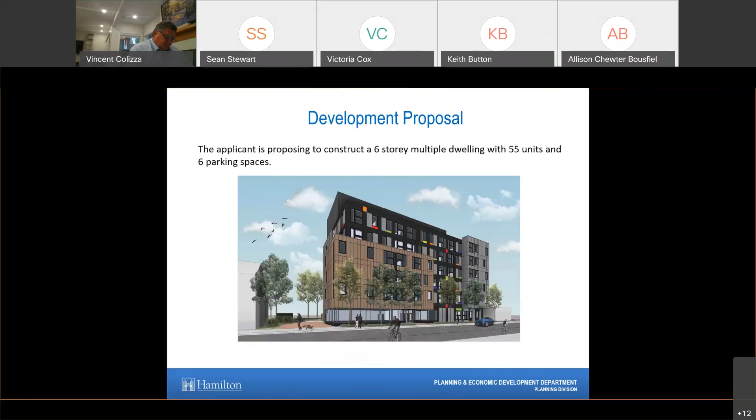This image shows the proposed site plan. Again, the building is fronting onto Bay Street North. The parking would be off of Cannon Street West, and there's amenity space behind the proposed building.

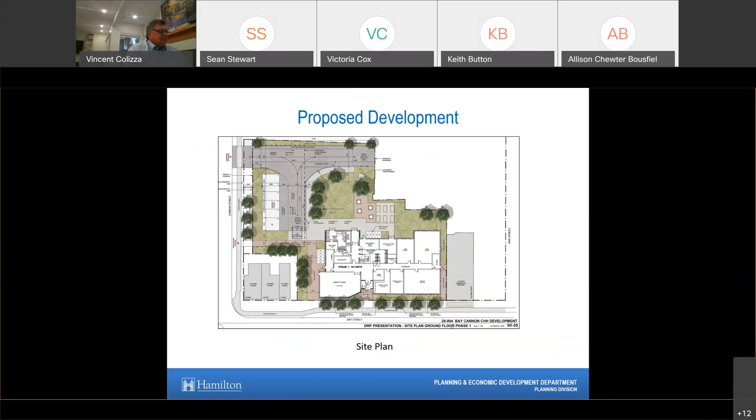The property is located within the Downtown Urban Growth Center on Schedule E of the Urban Hamilton Official Plan. It's also designated the Downtown Mixed Use Area on Schedule E1 of the Urban Hamilton Official Plan.

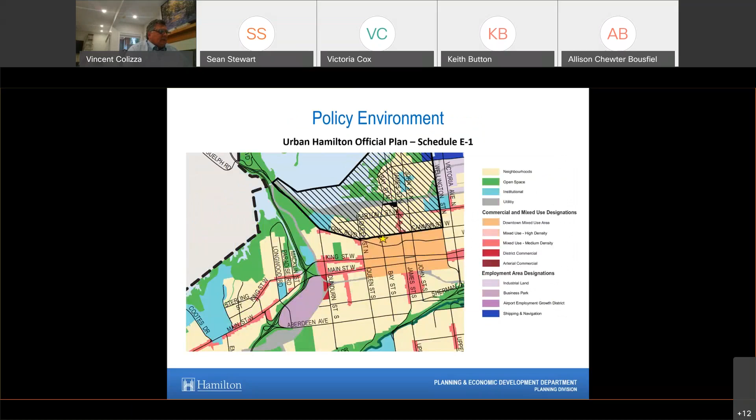Some major policy themes for the Downtown Urban Growth Center: it shall be the preeminent node in Hamilton due to its scale, density, range of uses, function, and identity. It shall be planned for a range of uses appropriate to its role as the city's preeminent node. It shall function as a residential neighborhood with a large and diverse population and range of housing types. The downtown mixed-use area shall serve as a central focus for the city by creating a sense of place.

Residential uses are permitted on lands designated downtown mixed use. A higher density form of housing shall be encouraged. Permitted uses shall be located in both single and mixed-use buildings.

Some urban design policies in the UHOP: the Urban Growth Center shall be designed with a strong pedestrian focus to create a comfortable and animated pedestrian environment, respect the character, development patterns, and built form and landscapes, promote quality design consistent with the locale and surrounding environment, contribute to the character and ambiance of the community through appropriate design of streetscapes and amenity areas, massing development to respect existing and planned street proportions, and designing new development to minimize impact on neighboring buildings and public spaces, including providing appropriate transitions in scale, and create a comfortable pedestrian environment.

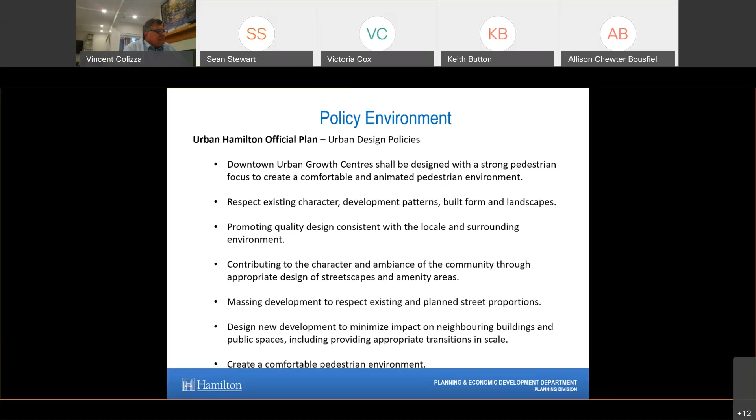The property is located in the downtown mixed-use designation of the Downtown Hamilton Secondary Plan.

It's also designated as High-Rise 2 in the Downtown Hamilton Secondary Plan. The downtown mixed-use designation supports intensive urban-scale mixed-use development, and the High-Rise 2 designation permits building heights up to 30 stories.

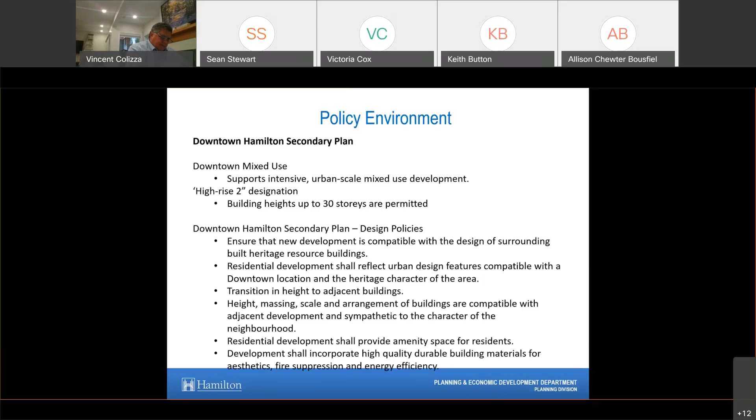Some design policies for the Downtown Hamilton Secondary Plan to be mindful of: development shall ensure it's compatible with the design of surrounding built heritage resource buildings. Residential development shall reflect urban design features compatible with the downtown location and the heritage character of the area. Consider transition in height to adjacent buildings. The height, massing, scale, and arrangement of buildings are compatible with adjacent development and sympathetic to the character of the neighborhood. Residential development shall provide amenity space for residents and shall incorporate high-quality, durable building materials for aesthetics, fire suppression, and energy efficiency.

The property is located in the D1 zone, downtown central business district. There are 3 holding provisions currently assigned to the property; however, they don't apply to the proposed development, as it's under 44 meters in height. The zone provides for a mixture of uses, including residential and standalone or mixed-use buildings. The maximum height is 94 meters.

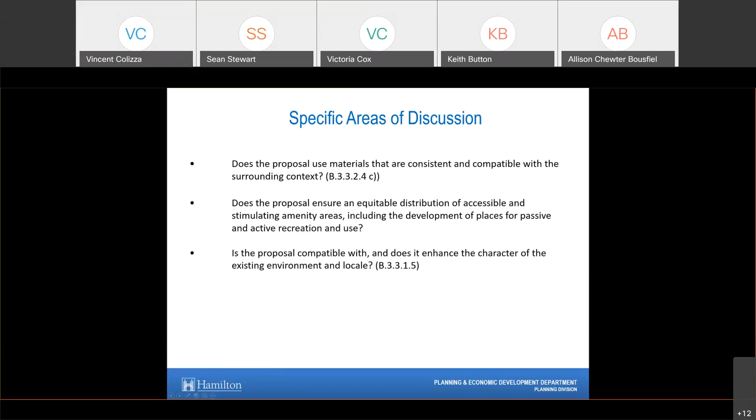Some specific areas of discussion that staff would like the panel to consider: Does the proposal use materials that are consistent and compatible with the surrounding context? Does the proposal ensure an equitable distribution of accessible and stimulating amenity areas, including the development of places for passive and active recreation and use? And is the proposal compatible with and does it enhance the character of the existing environment and locale? That concludes my presentation. Thank you.

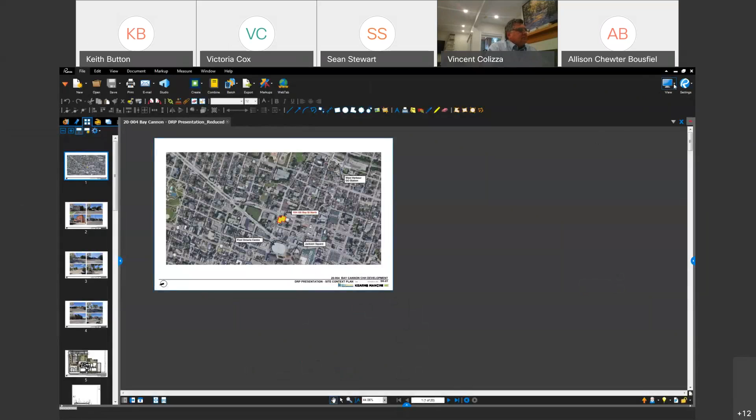Can everyone see my screen? No, sorry, we're not able to see it. Okay. What about now? Yeah, we're starting to see it here. Yes, now we can see it. Okay.

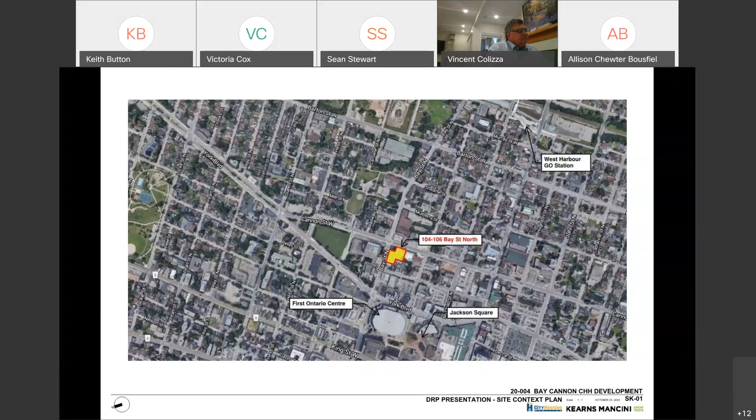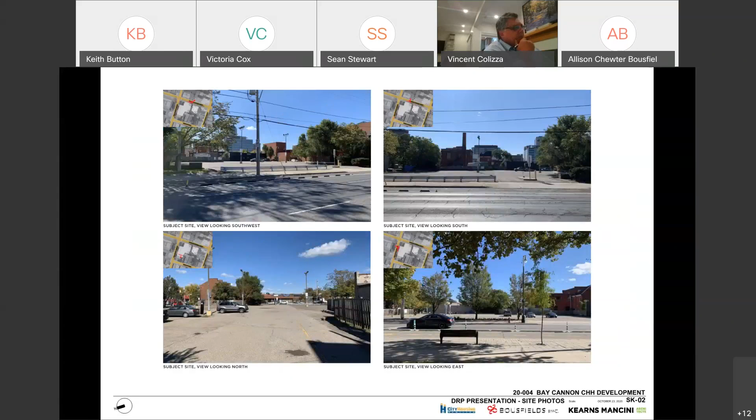I probably will not go through the items that Sean has just gone through, so I'm going to skip this context plan, as well as the surrounding neighborhood context. The current site is an existing city parking lot.

Can I just say that your voice isn't coming through very clearly? I'm not sure if you're on a speakerphone. I'm actually on speakerphone. Is it better now? If you could, yeah, there's just a lot of background echoing and so on.

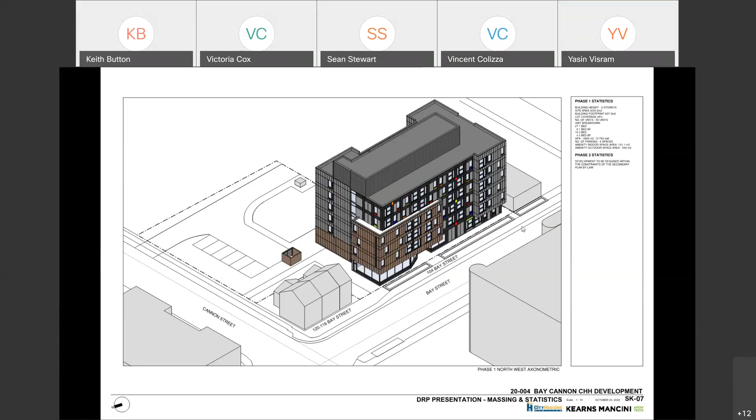Here's the back side of the building, with the larger 3-bedroom units at the corners and therefore the bump out at the end of the building.

The overall height of the building is 21.5 meters up to the roof at the 6th floor, and approximately 5 meters above that for the mechanical penthouse.

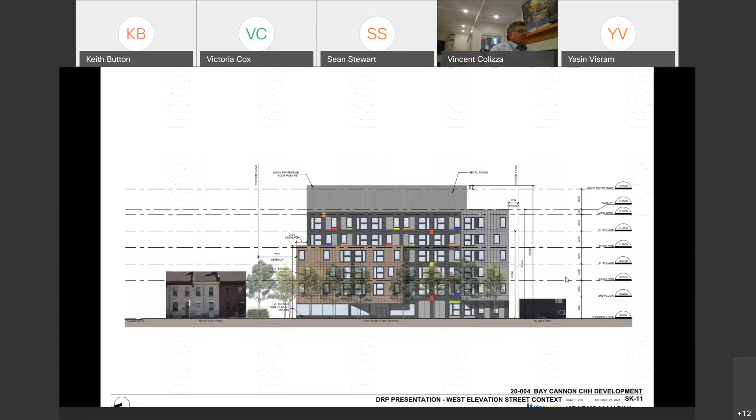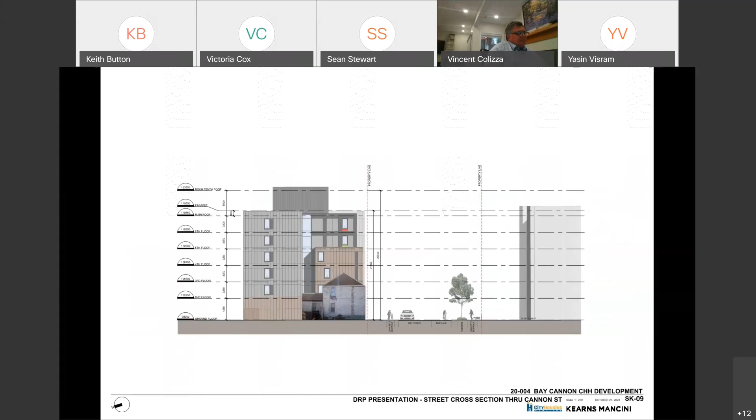Here's a view from Cannon Street, showing the building behind the townhouse at the corner, and more or less the same height as the school across the street.

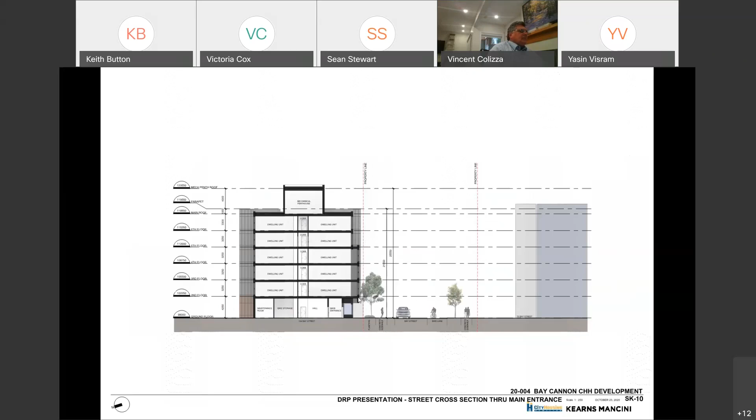Here's a section through the building. The attempt is for the building to be as close to the property line as possible, to respect the setback and alignment of the 2 existing buildings on the north and south side.

Here's the material part of the building. We are proposing to use cement board in various colors and textures, distinguishing these 2 masses, with a kind of grid line arrangement for the central portion of the facade.

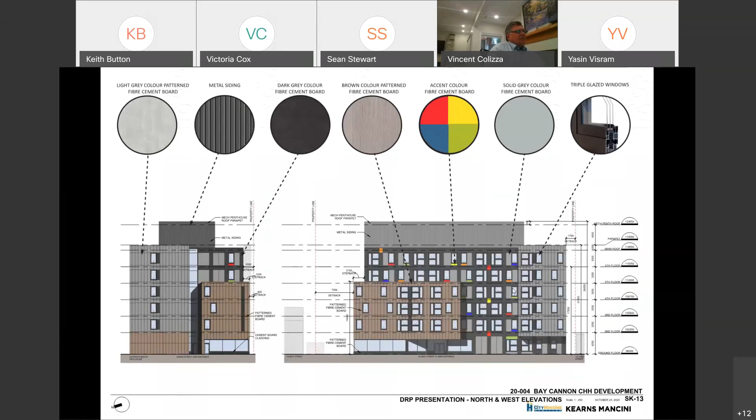And here's the back side, carrying on the same idea.

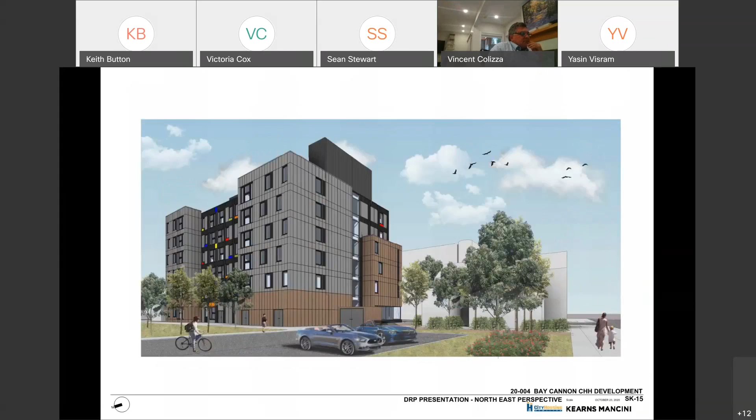The interior planning of the building is pretty typical, single double-loaded corridor, where the 3-bedroom townhouse and 3-bedroom suites are distributed at the corner because of the need for windows for multiple bedrooms.

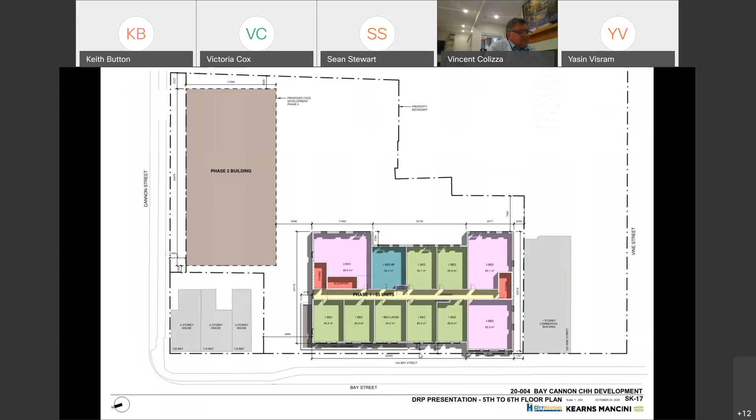Here's more or less the footprint or the envelope of the phase 2 building. The 5th and 6th floor step back from the northwest corner of the projection below. And here's the roof line.

And with this, I conclude my presentation.

Okay, are you finished now, Mr. Button? Yes, we are. Thank you.

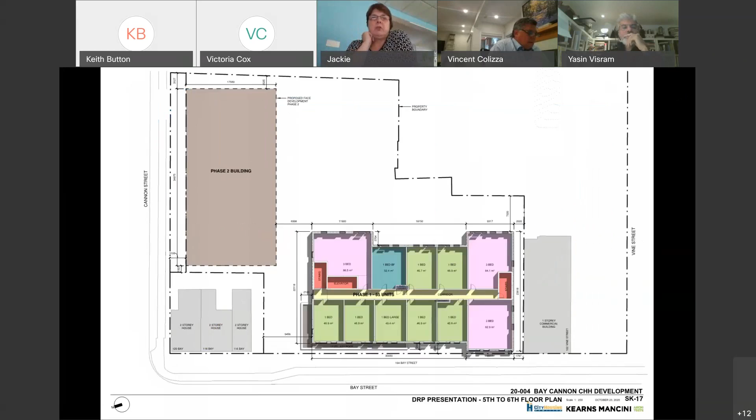Thank you, Vince. Peter, question about the outdoor amenity and its relationship to the indoor. Right now they're separated. Was there any study done that allowed those two to come together, to be adjacent to each other?

So, Jackie, I missed your question. Could you repeat it again? Yeah, the outdoor amenity right now is not adjacent to the indoor. Were you able to have any studies showing how they could be adjacent to each other?

We have, and due to the configuration of the site and the desire for the amenity area fronting Bay Street, we opted to locate the amenity room at the northwest corner rather than the back. We also considered that the patio to the north of the building could serve as part of the amenity.

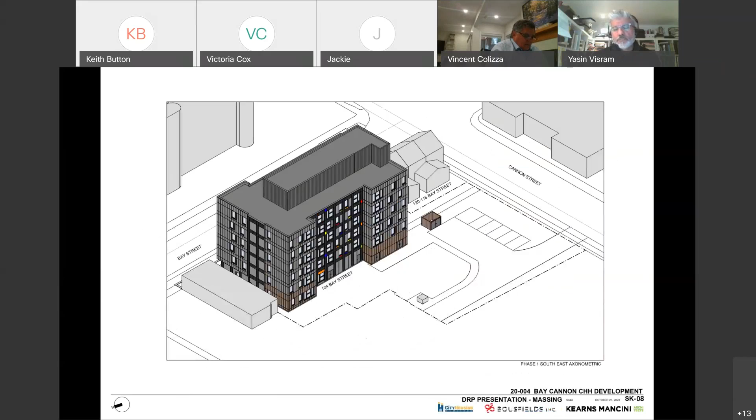Are the windows openable? Operable, yes they are. But in a passive house envelope, you would not recommend balconies, is that correct? That's correct, so we move away from having balconies or any projections, because of thermal bridging. That's right, the building is to have absolutely no thermal bridging in any way.

Okay, it's very interesting, I'll leave it at that. Thanks, thank you. Thank you, Yasin. Colin? I have no questions, thank you. Yuta?

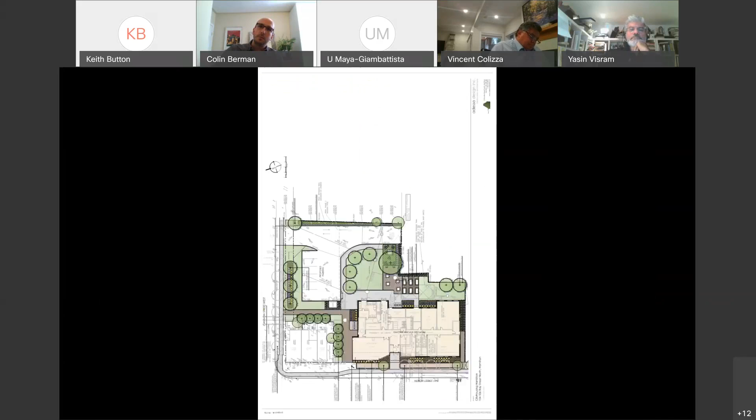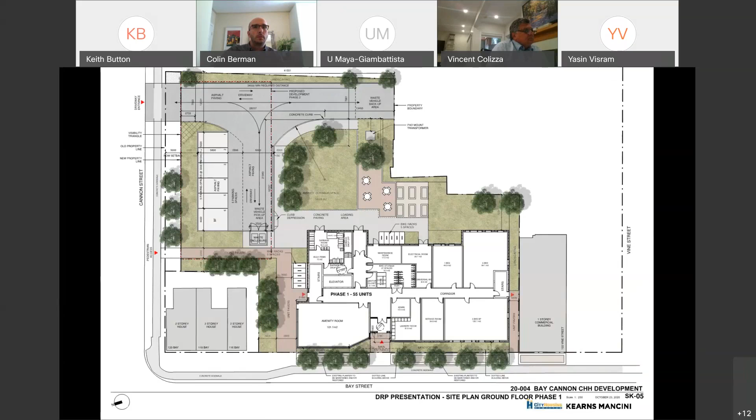Just one quick question, if you go back to your overall site plan slide please. That's perfect, thank you. Keith, I was wondering if you could take us through the rationale of how parking and the driveway aisles were determined for your ultimate phase. Maybe we can go to the site plan showing the ultimate footprint for your phase 2 building. Can you take us through the design process of how you determined this was the best approach to the underground parking? Yeah, we really don't have much choice.

First of all, we only allow one vehicular entrance into the site, and therefore the secondary entrance for services is combined with the underground parking access, future underground parking access. We can't put it elsewhere because it would be too close to the corner, and we wouldn't have enough room to achieve the necessary headroom for the underground parking level. So we combine the surface vehicular circulation with the access to underground parking, and given that we already have this in phase one, we just continue it at this location to serve as the entrance to the underground parking as well.

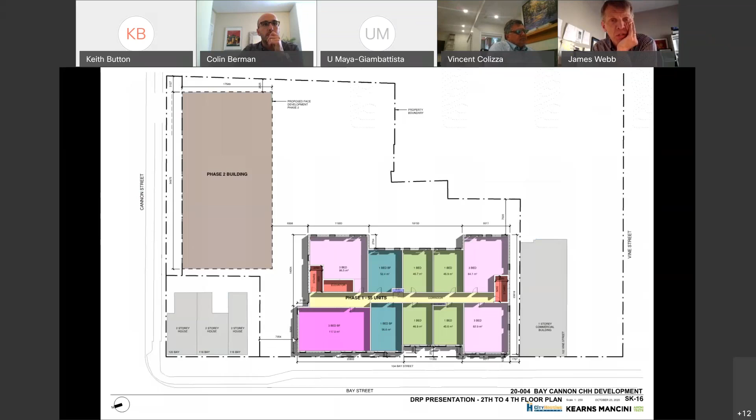Okay, the next question. So I understood in your presentation that you've tried to achieve some symmetry with the heritage buildings by a projection on the north end of the Bay Street frontage building. I'm just curious, on the south side you've also gone with a projection. Is that a functional or purely aesthetic design consideration? Is there something behind that projection?

And effectively what you've done is you've recessed the center of the building. So on the left-hand side, you've created a projection for the lower 4 stories, which tries to accentuate a base and achieve some symmetry with the heritage buildings. On the right-hand side, you've also done a projection. What's the thinking behind the projection on the right-hand side?

The reason is we do not have enough area at this corner of the building to accommodate 3 bedrooms. That's why we project this part of the building outward, and also to balance this mass on this side in a vertical manner. It has more to do with composition and also the need of a larger floor plate at this end of the building for 3-bedroom suites.

Okay. I guess my last question on that same elevation, on the right-hand side you have one 3-bedroom unit that's going to be at grade. What are you doing with that unit to try and give it some privacy, amenity, or street connectivity?

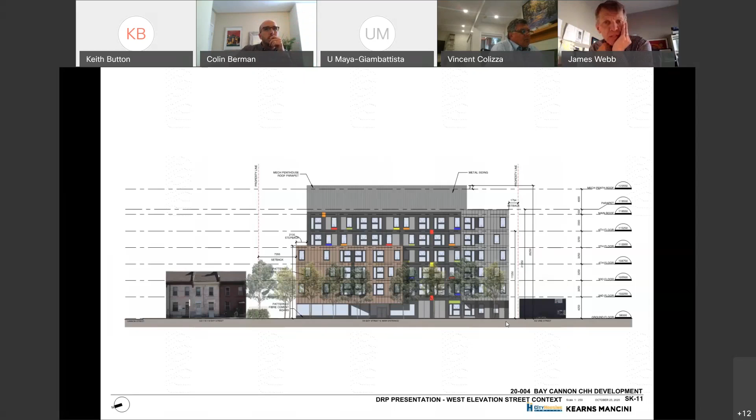Yeah, there is landscaping in front, approximately 2 meters of soft landscaping in front of this 3-bedroom unit. Due to City Housing Hamilton's facility management policy and maintenance reasons, access to this landscape space is not being considered at the moment.

Okay, last question. The connectivity on the right-hand side of the building between the building and townhouses seems to be shown as hardscaped. Is there any reason you can't add more soft landscaping in there? I think that was essentially the question too.

Yeah, the exit there is coming out this way, and therefore we try to keep this path as quick as possible. It's approximately six foot wide. There is a possibility maybe we can add a very small strip of soft landscaping.

No, I apologize, I was actually referring to the north side, between. Oh okay, yeah, can you create more green space there? We certainly can, and we are considering that at the moment. Okay, that's all, Vince, thank you.

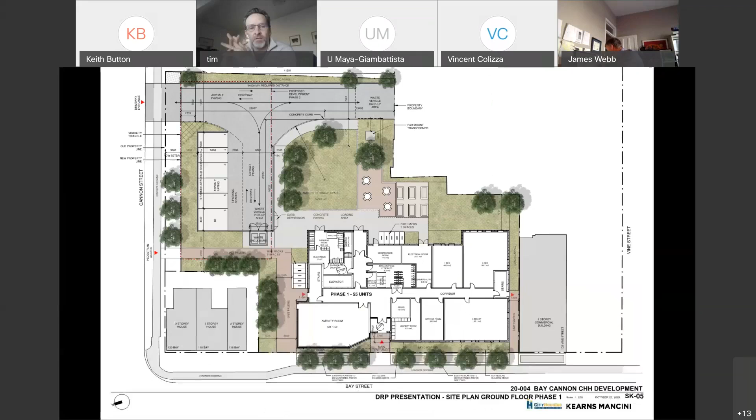Hi Tim, it's Shannon McKie. I don't think we have anything formal for that site across the street. I think there were discussions about a hub, but we don't actually have anything formal to be able to confirm any of that. Okay, no plans at the moment.

No. Okay, thank you. And for the applicant, you might have addressed this in your presentation, I might have missed it, but the side yard setback there on the north side at about 7.5 meters - why is it that large a setback? You mean this dimension, here? Yeah, that's correct. First of all, we want to make sure that we have enough horizontal distance to make the scale transition from these 3 houses to the 6-story building.

And also, due to limiting distance from the Ontario Building Code, if we do not set back at least 6 meters from the property line, we would not be able to have unprotected window openings on the north side as well. Okay, thank you, those are all my questions.

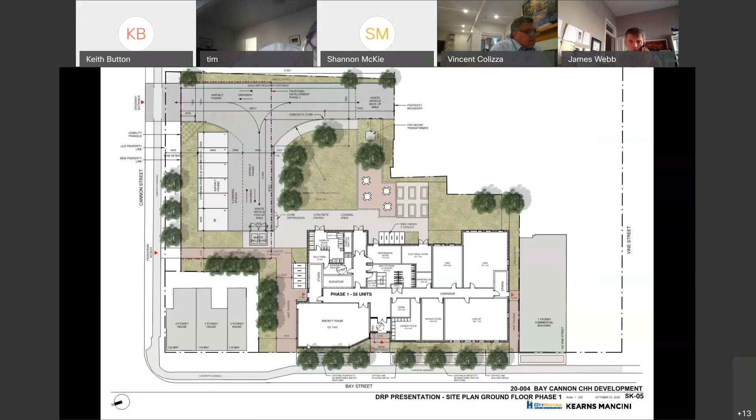Thanks Tim, if you could take the chair a sec, Tim. Sure. I just have a question on materiality, Mr. Button - is Passive House looking for a lightweight skin? Is that part of the rationale for using the panel, a lightweight panel approach that you're using?

Yes, it depends on the wall type, and if it turns out to be kind of like a cavity where we have very thick insulation outboard of the sheathing, that means we would have very large brackets holding up the secondary cladding system girts and structure. That's why, at the moment, we are only considering a lightweight cladding system rather than something like masonry, such as brick. Right. And you're confident in the durability of those materials?

Confident that we are confident in the durability of those materials, that they're going to perform long term? Yes. Okay, so that's all my questions for now.

I think we'll close the Q&A session and move on. Based on the information provided by city staff and the applicant, each panel member will now provide feedback and recommendations, and we'll start with Jackie.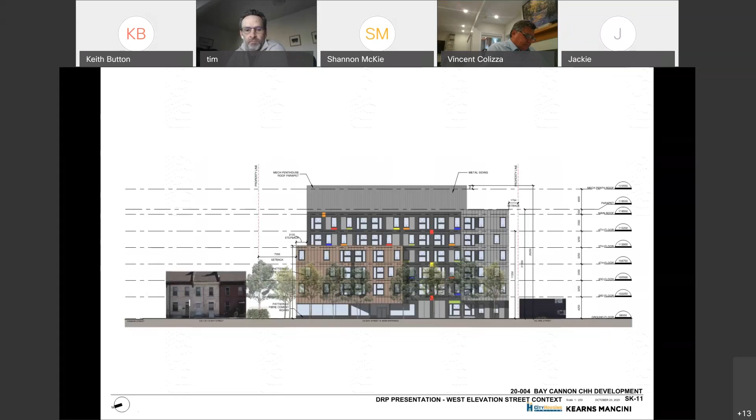Thank you, Vince. My comment is following up on my question. I would suggest another look at that amenity space, combining the indoor and the outdoor. That one bedroom and two bedroom facing the top of the drawing creates a no man's land in that amenity space. You don't really want people standing at the windows looking in. So you lose some of that amenity space if they remain bedrooms. But if it's an indoor amenity, you can capitalize and maximize all of that amenity space, and you create a much better synergy between the indoors and the out.

And I would say that where the amenity room is could be another series of townhouses to carry on with what is in the existing stock there. So those are my suggestions. Thank you, Vince. Thank you, Jackie.

We'll go to Yasser. Thanks, Vince. So I have a couple of comments just overall.

I agree with Jackie's comment about the amenity space. I think it would have been a lot better if that was somehow connected to the rear amenity space. And I get the sense that it's probably something about the phasing of the site, the fact that you're developing the Bay Street side first. I think you're having to include the roadway in a different location, because I could see the driveway to the underground being in a different location, which would allow you to bring amenity spaces close to the edge of the building on both sides in phase 1 and 2. But I think that's maybe a moot point at this stage.

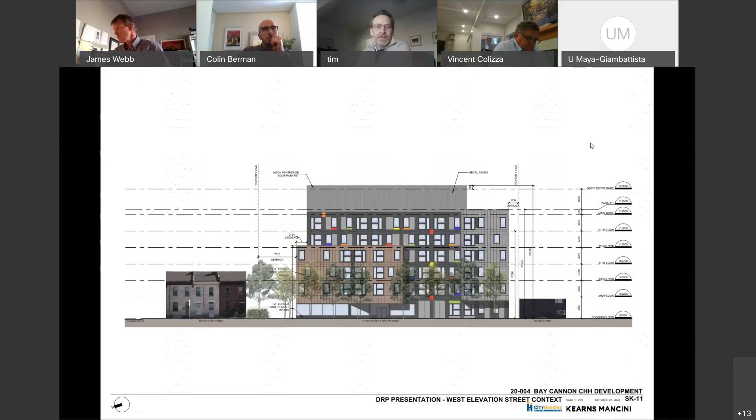Thank you for the presentation. Just a few comments. I agree with my colleagues, specifically their comments regarding the rear of the building, the excessive paving. There was quite a bit going on back there.

One small thing that will help, I think not insignificantly, is to simply move the door to the garbage room to the side of the building and to the back. I think there's going to be some conflicts there, at least some of the time. And I see you've moved the receptacles, but moving those to the side of the building too would be an improvement. And I agree with Jackie's comment about moving the amenity space to the rear.

And I like your idea actually of converting that space to 2 or 3 townhouse units. I appreciate that's a pretty significant design change, but in fact it would be an appropriate use at the front there and a nice transition to the townhousing. So I do urge you to consider that.

I think my main concern really is the look of this building from Bay Street. The fiber cement board, I thought it was not a great insulating material, but I won't challenge that. You certainly know what a passive house is, so I'm sure it can do the job. But I assume it's also being used for its cost.

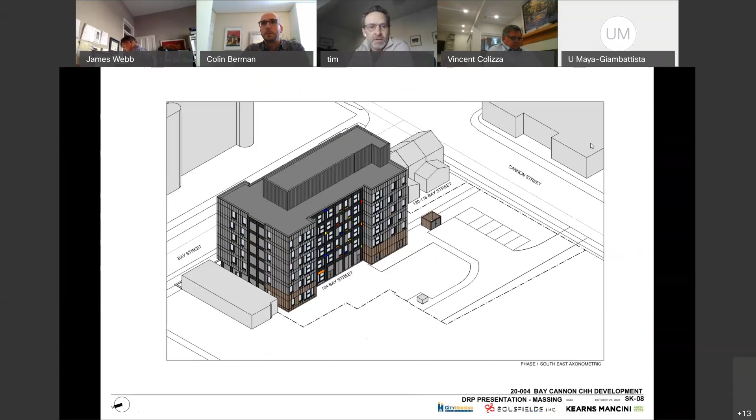And this building to me is just not probably going to look that great in a few years. It's a material that does need maintenance. And I think you've almost acknowledged it's not going to look great by throwing these dabs of color onto the facade in just some kind of random pattern.

So I just think you need to reconsider the materiality, picking up on Uta's comments, at least for the facade of the building and wrapping around the sides, at least part way, and moving to at least some, if not entirely, a precast material or actual masonry material. When I say precast, to look like masonry, there really should be the appearance of some brick on this facade. It could be just the projection there, the brown projection at least, but I would consider it elsewhere as well. So just a slightly higher quality material on the facade, I think, is critical.

There's also just a lot going on the facade here. There's not random, but a staggering of windows. There's different tones of gray going on. I think just a simpler treatment of the facade would be better.

If you want to use color, I'm not sure you need it, particularly if you do change the materiality. But I would suggest a single band of color vertically or horizontally across the building, as a gesture, would be better than this kind of random pattern here. It makes the building look a little bit frivolous. So I do urge a more simplistic approach to the facade and higher quality materials. And those are my comments.

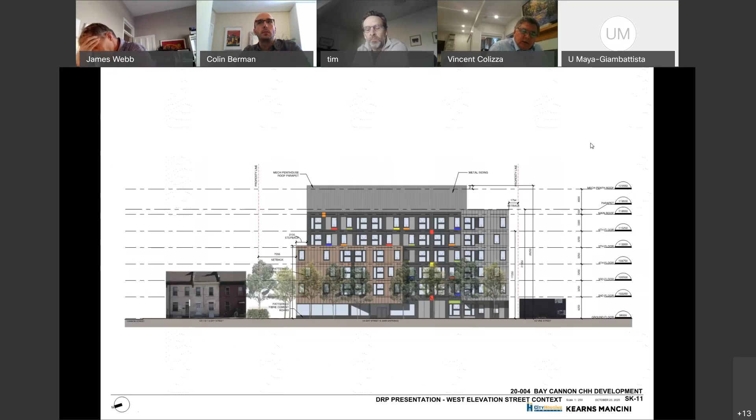The comment I had was, everyone seems to be commenting on this large rear yard, and I couldn't help but look at the plan and suggest that the rear lane, on the north side, the long lane with the backup space - if you did consider, and you may have, a lane that goes in and turns at the very end of the backup space into the future garage. I know in the short term you need to provide access to temporary parking, which I could see being off of that lane on the way in from Bay Street, Cannon Street, devoting that space, a limited driveway depth in the short term with 5 or 6 stalls, and then in the future extend it down to a ramp that goes in along the north side and back in, generating a more cohesive landscaped area.

From Cannon Street south of that northern lane across the site to link to the building, you could provide a slightly wider sidewalk for temporary access for garbage removal, similar to what you have behind the heritage buildings on the corner. That could become a bit of a service lane, but again it's a temporary use once a week or whatever it is. So it might be a way to bring some of that green space down to where you planned on putting the ramp into the future garage and devoting that turnabout at the top to come in where that green space is at the top of the site, and then broaden right out to Cannon Street.

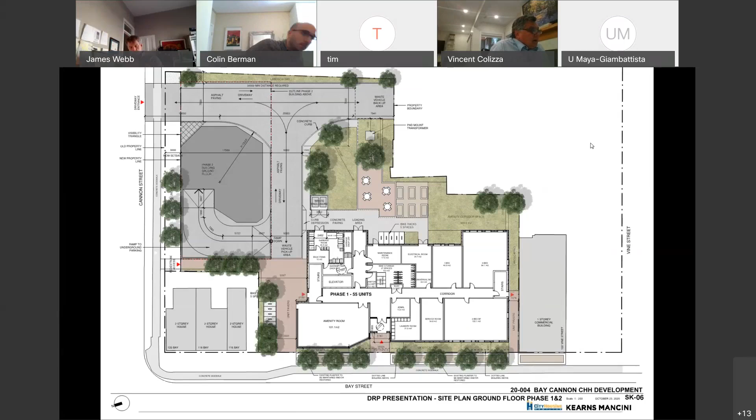So, Mr. Button, do you have any questions or any clarifications you need? Yeah, thank you for all the comments and observations, and we will consider them.

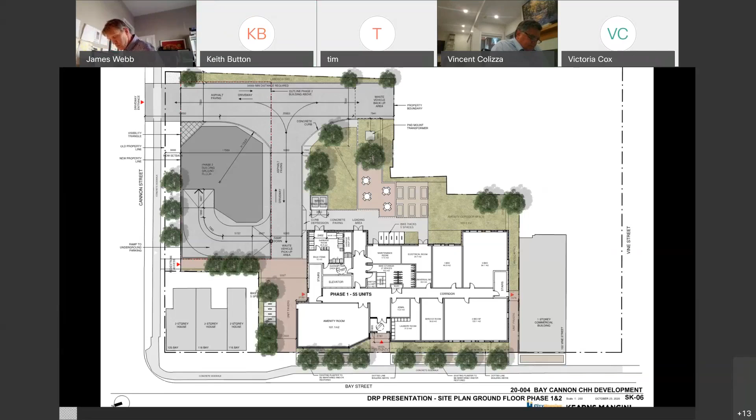And will there be some kind of a written summation of what was said? Yes, so in the next 3 weeks I'll follow up with a finalized written summary of the meeting. Okay, yes, that will be very helpful.

I'm sorry, can I make a last comment? I know we're beyond our time, but just a quick comment. Was there no chance of doing one less bedroom at the back and switching the amenity for the bedroom at the back, and possibly having a retail unit at the front? That would be up to the City Housing Hamilton. Okay, all right, well, something to consider. I'll leave it at that.